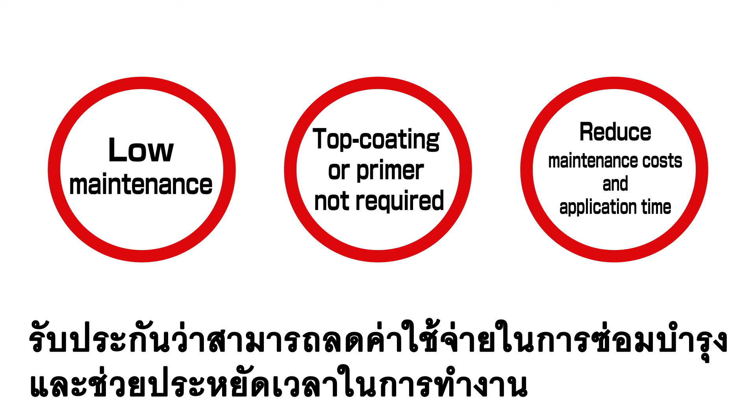As it's pre-packaged in single packs, it doesn't require mixing or the additional use of a primer or top coat. It's easy to use and can be applied directly to steel and galvanized surfaces. ROVAL is low maintenance and guarantees a reduction of both maintenance costs and application time.

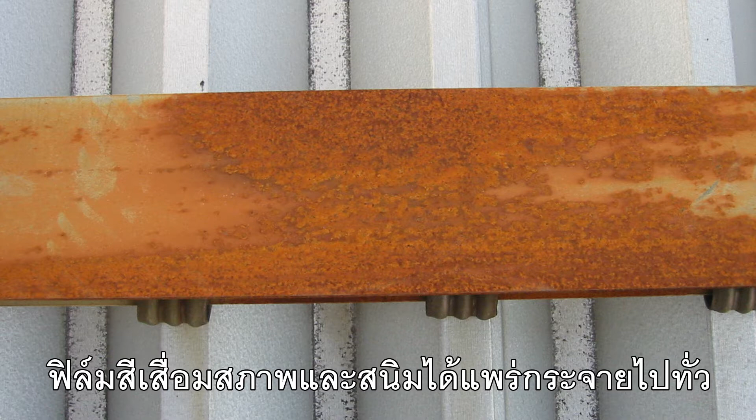This is a photograph of steel frames 7 years after being painted with conventional paint. The paint film has deteriorated and rust has spread throughout. This steel frame will be repainted with ROVAL.

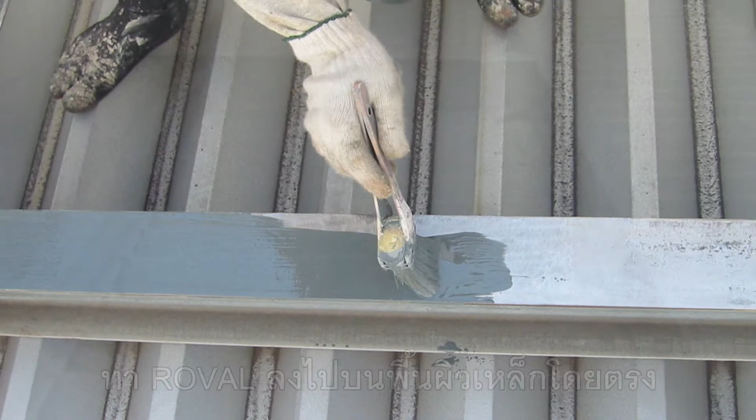Remove all rust and old paint with the appropriate power tools. Apply ROVAL directly to metal surfaces. Here is a photograph of steel frames 10 years after being repainted with ROVAL. There is no rust.

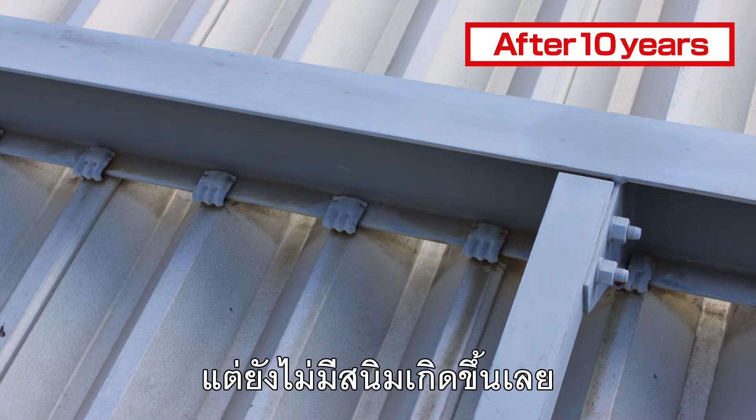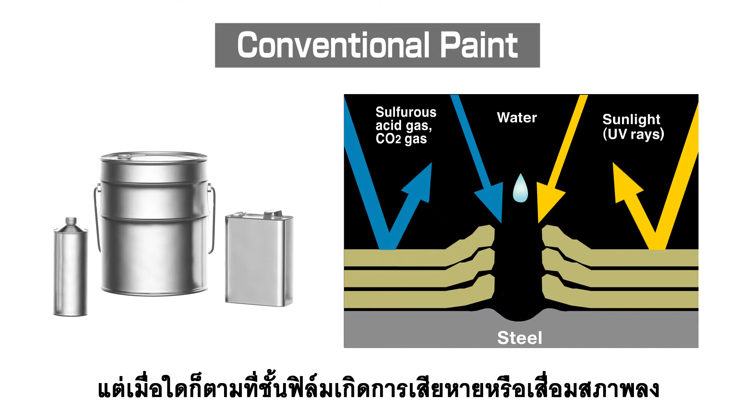What is the difference between ROVAL and conventional paint? A conventional paint film acts as a surface barrier against water and air. But once the film is damaged or has deteriorated, rust develops in that area and begins to spread underneath the film.

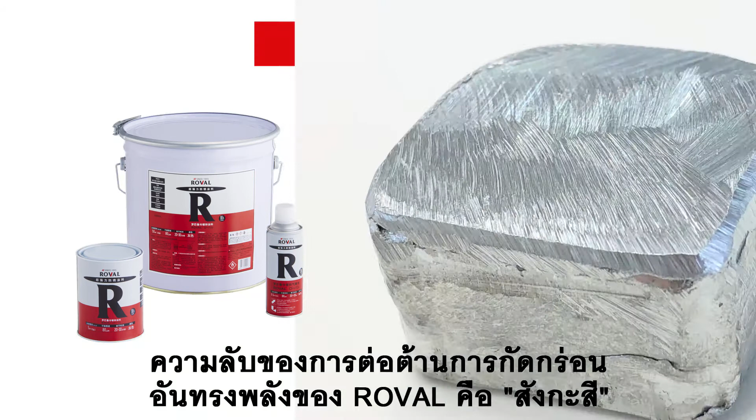The secret of ROVAL's powerful anti-corrosion is zinc. The metal zinc rusts more easily than iron. By using this property, keeping the iron and zinc in close contact, only the zinc side will rust and not the iron.

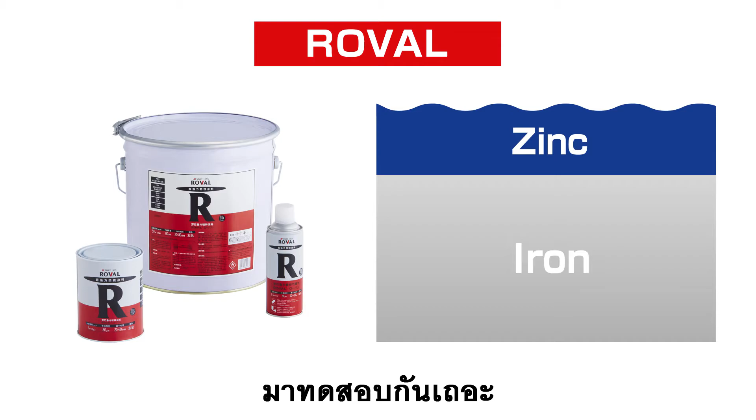Let's actually verify. Prepare 2 steel plates and immerse one in salt water. On the other steel plate, put a slab of zinc and immerse in salt water.

After 2 weeks, only the steel plate without zinc has rusted. On the other hand, the steel plate carrying a slab of zinc has not rusted. The zinc protects the iron by rusting instead of the iron.

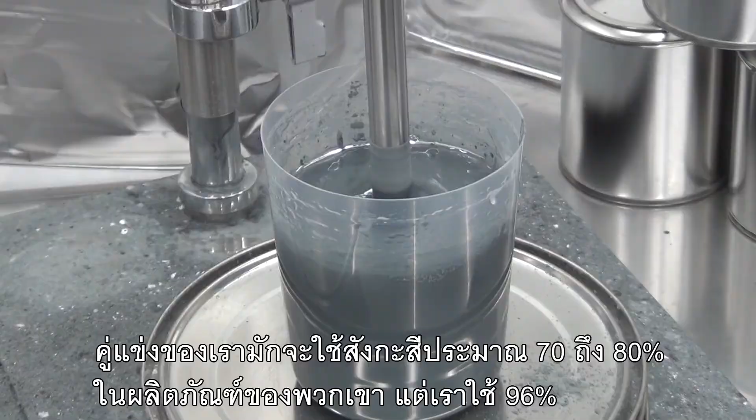We succeeded in raising the dry film zinc content to 96% by mixing a large amount of zinc powder into a special resin. Our competitors usually use around 70 to 80% zinc in their products, but we use a staggering 96%. ROVAL is a paint that can make the most of the anti-corrosion ability of zinc.

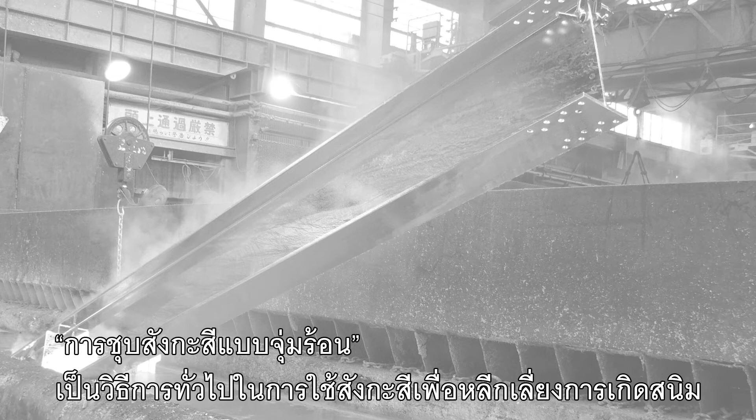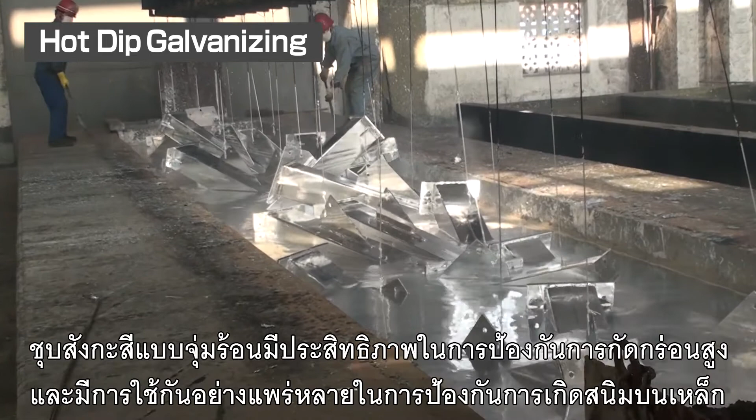Hot dip galvanizing is the most common method of using zinc to avoid rust. Hot dip galvanizing is the process of forming a protective film of zinc by dipping steel structures into molten zinc with a temperature above 430 degrees centigrade. Hot dip galvanizing has high anti-corrosion performance and has been used widely for rust prevention on steel.

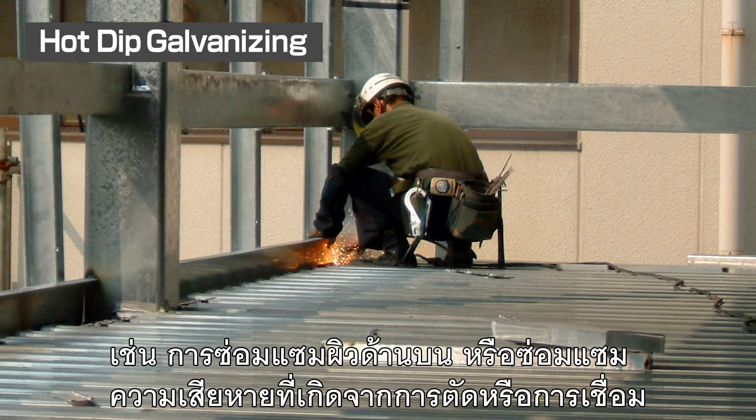Since this process requires the use of large equipment, it is not practical for small applications such as touch-ups or repairs of damages done by cutting or welding. Conventional paints are not suitable for such repairs because they do not provide strong enough protection.

ROVAL combines the ease of painting with the excellent corrosion resistance of hot dip galvanizing. Since ROVAL is simply applied in standard temperatures, it is called cold galvanizing compound.

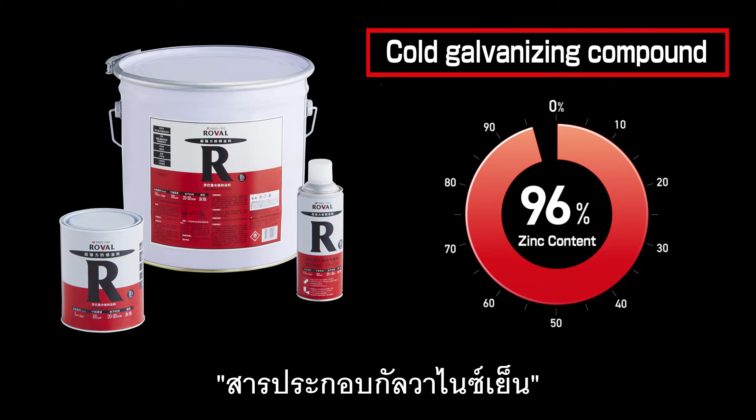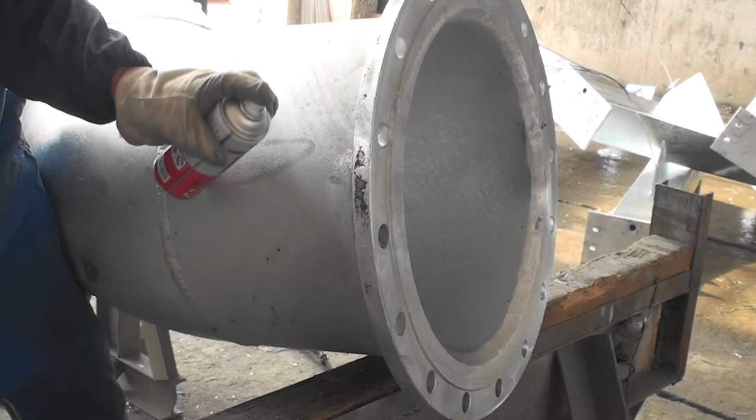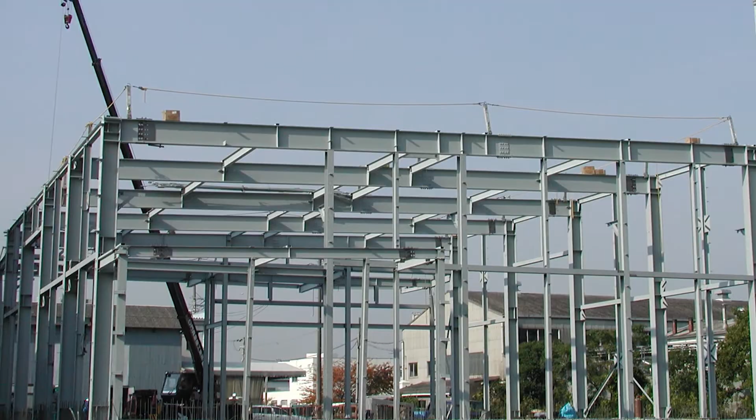ROVAL can be used not only for touch-ups of cut surfaces, welds, and non-plated parts, but also for large steel structures and parts that are difficult to be hot dip galvanized. ROVAL can be applied directly to old or thin galvanized surfaces to prolong the anti-corrosion effect without the need for additional re-galvanization.

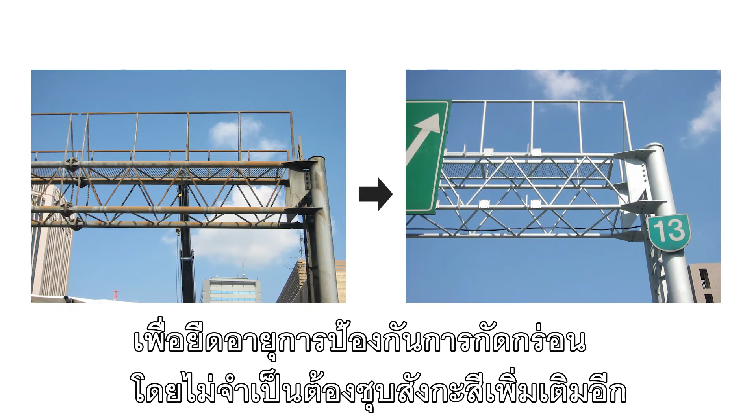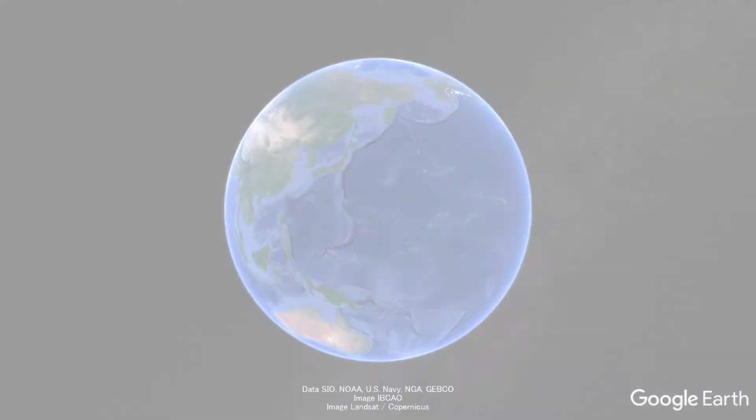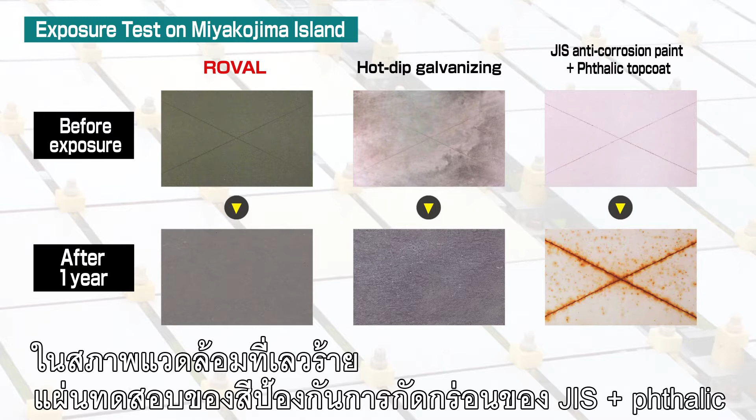We conducted an exposure test on Miyako-jima Island. It is surrounded by sea and located in the southern area of Japan. Here are photos of the test results. In such a harsh environment, test pieces of JIS anti-corrosion paint plus phthalic topcoat generate rust in 1 year. And in 3 years, the rust spreads over the entire surface.

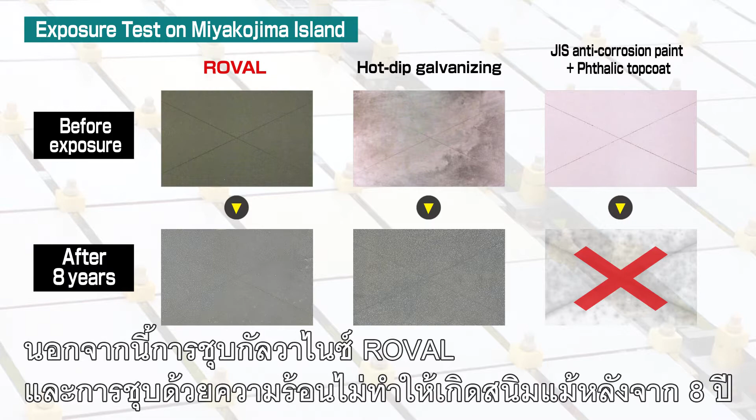On the other hand, with ROVAL and hot-dip galvanizing test pieces, no rusting occurred even after 3 years. In addition, ROVAL and hot-dip galvanizing did not generate rust even after 8 years. As you can see, ROVAL alone can guarantee long-term maintenance-free performance without the need for a primer or top coat in an easy application format.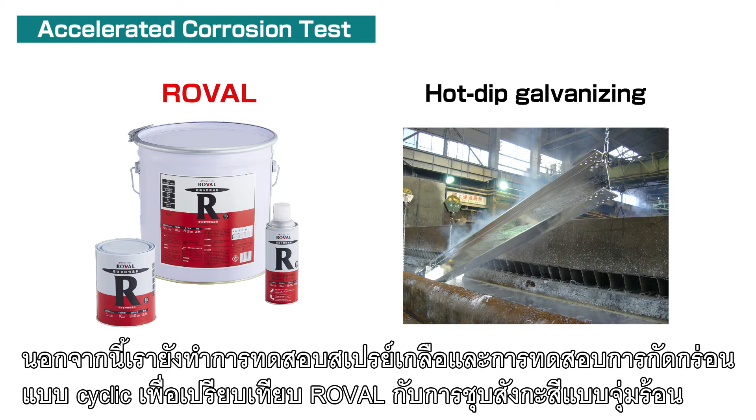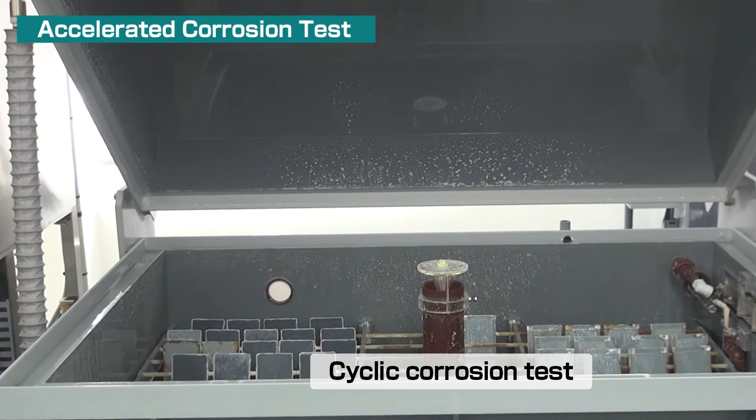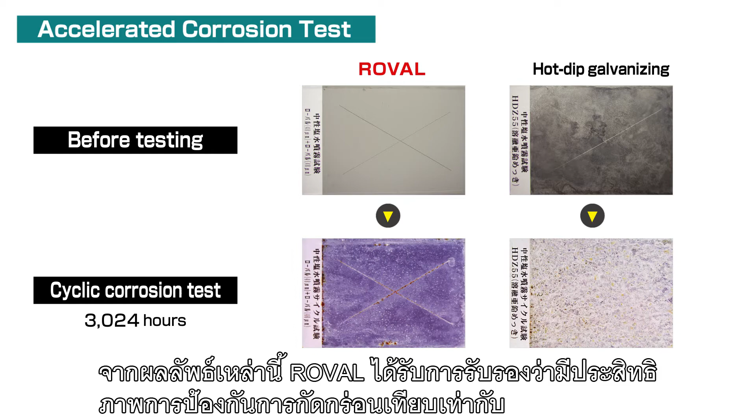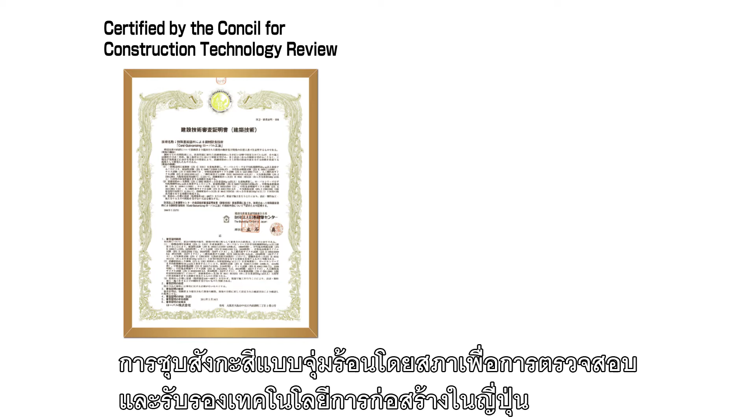We also conducted a salt spray test and a cyclic corrosion test to compare ROVAL with hot-dip galvanizing. Here are photos of the test results. From these results, ROVAL has been certified to have equivalent anti-corrosion performance as hot-dip galvanizing by the Council for Construction Technology Review and Certification in Japan. In addition, ROVAL's excellent performance was recognized and certified by the Minister of Land, Infrastructure and Transport.

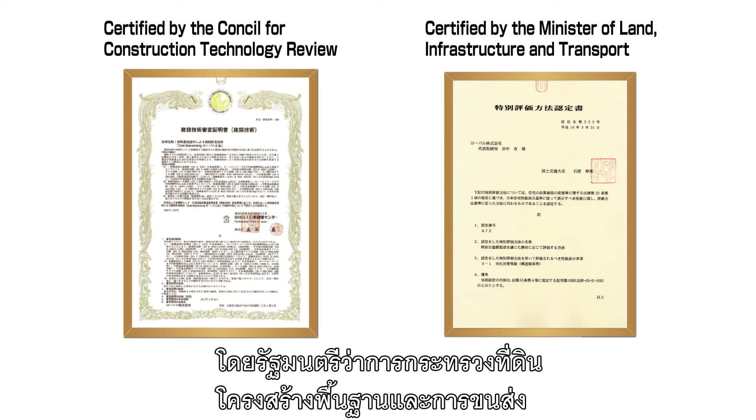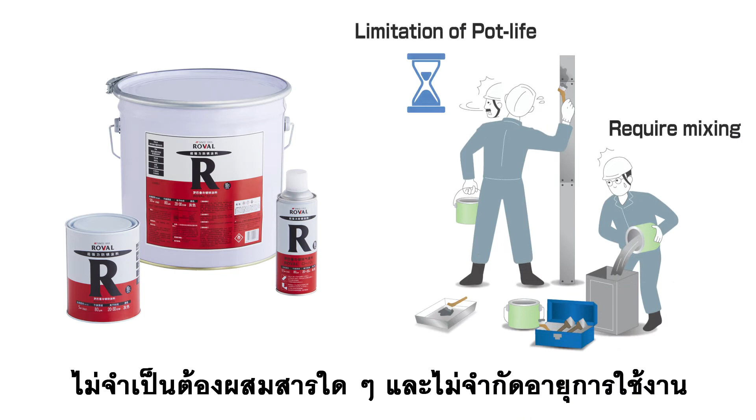ROVAL is an easy-to-handle, single liquid-type compound. It does not require any mixing and has no limitation of pot life. The rest of the paint can be kept in a closed container.

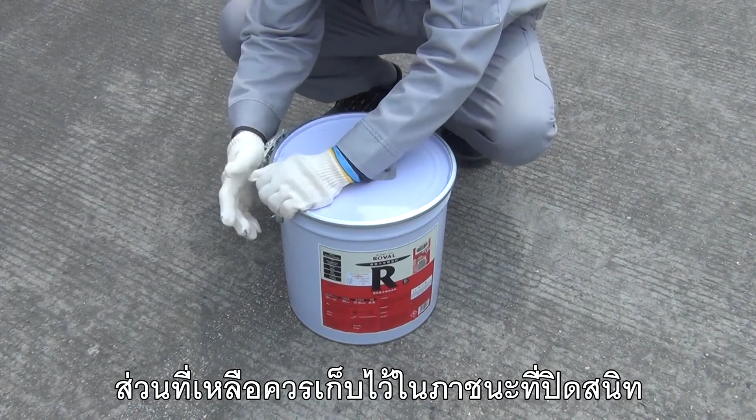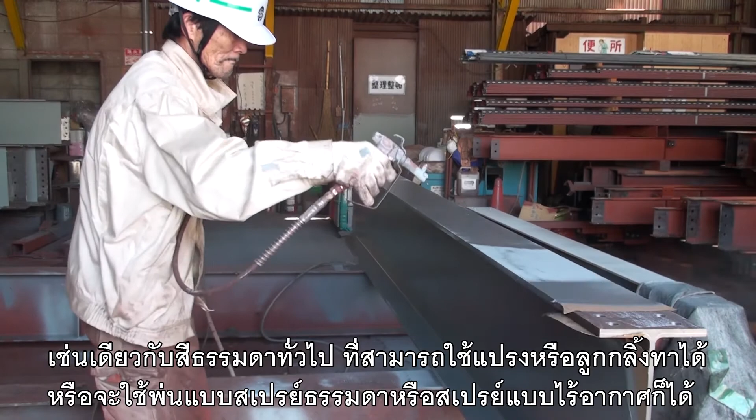Like other conventional paints, it can be applied with a brush or a roller or a conventional spray or an airless spray. An aerosol version is also available.

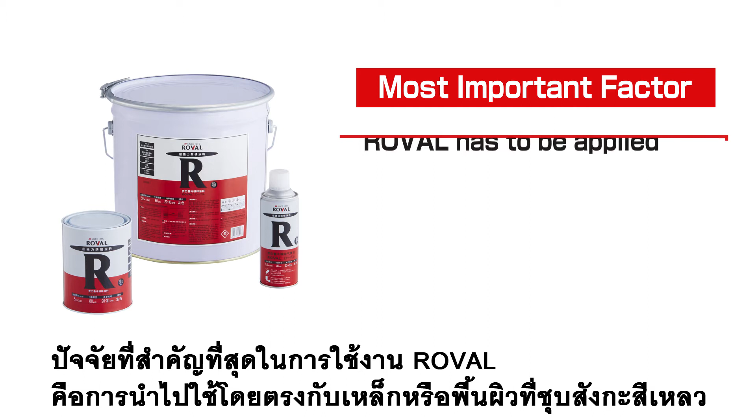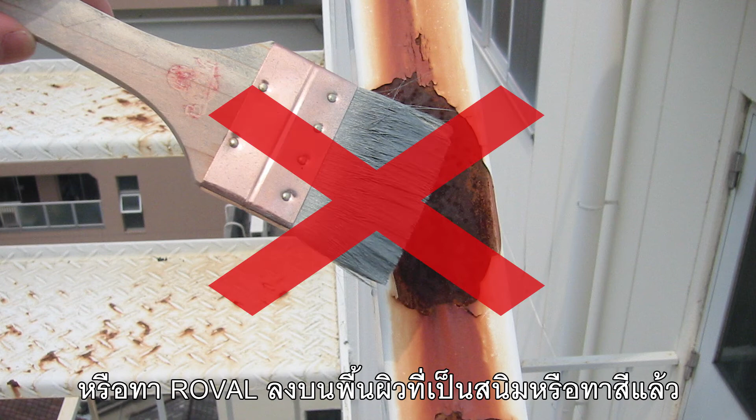The most important factor in the application of ROVAL is to apply it directly to the steel or galvanized surface. Do not use a primer, or apply ROVAL to rusted or painted surfaces.

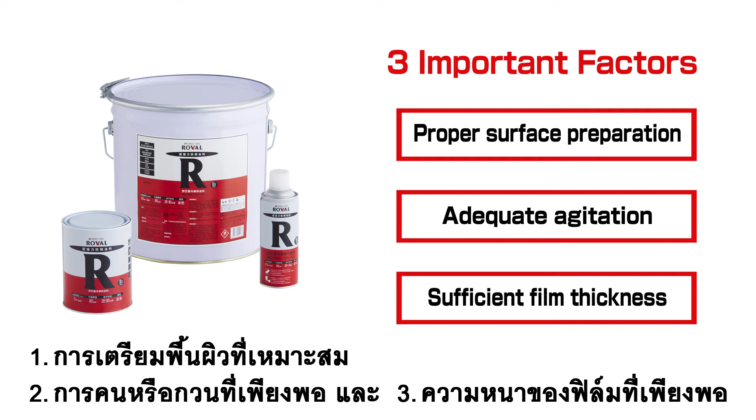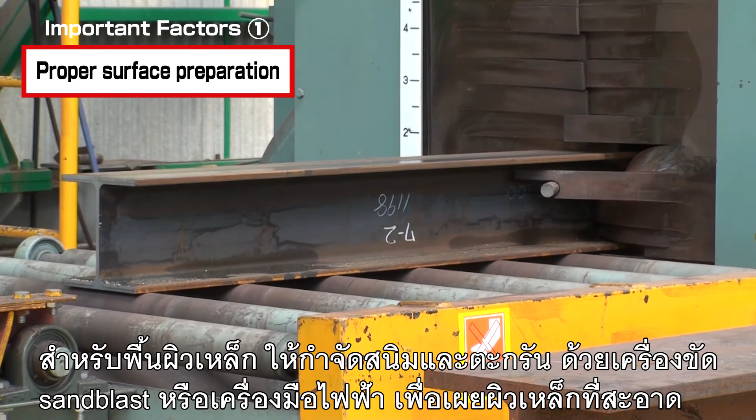3 other important factors in the application of ROVAL are proper surface preparation, adequate agitation, and sufficient film thickness. First, proper surface preparation. When applying ROVAL on galvanized surfaces, use a hand tool to remove white rust. For steel surfaces, remove all the rust and mill scale by sandblasting or using a power tool to expose the clean steel surface.

Second, adequate agitation. Because ROVAL contains a lot of powdered zinc, the contents may settle at the bottom of the can. Use a power paint mixer to obtain uniform viscosity. ROVAL's viscosity is pre-adjusted. Dilution is not required.

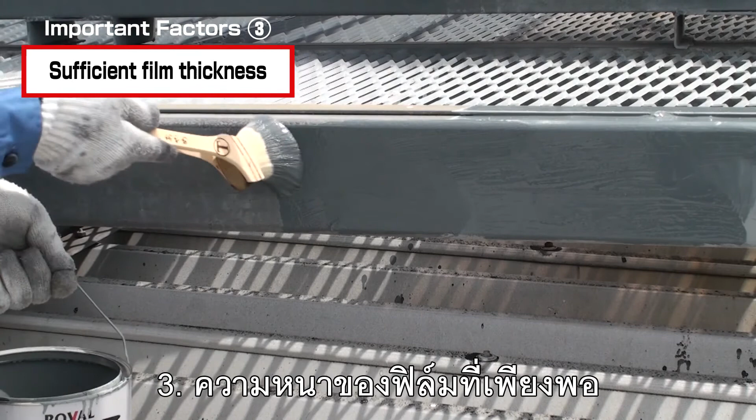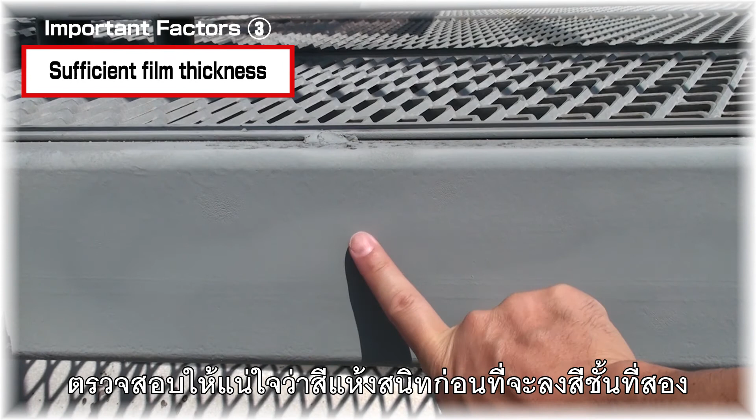Third, sufficient film thickness. Anti-corrosion performance is directly proportional to dry film thickness. Do not spread the paint too thin. Apply 2 coats of ROVAL to obtain a film thickness above 80 micrometers. Make sure the paint is dry to touch before applying a second coat.

While keeping the outstanding anti-corrosion ability of ROVAL as it is, we have launched a water-based version called Aqua ROVAL. Compared to ROVAL, Aqua ROVAL cuts VOC by 93%, has no thinner odor, and no fire hazards. You can use it with confidence in shopping centers, train stations, and public facilities.

Aqua ROVAL pots are sold with their zinc powder and paint solution packaged separately. Just before use, stir the paint solution, then add the zinc powder little by little. After that, stir the mixture well with the power paint mixer until lumps disappear.

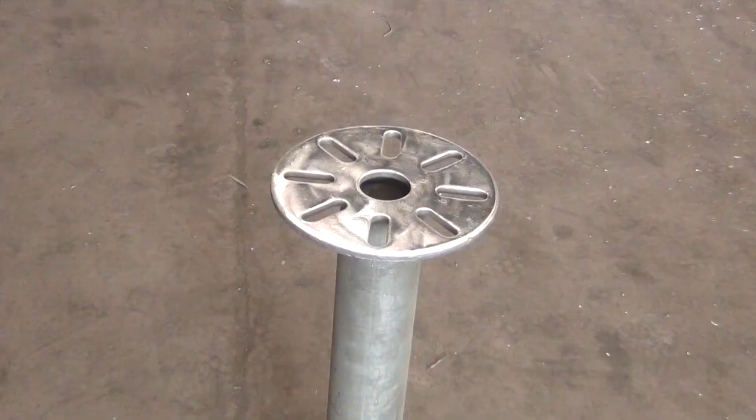In addition, ROVAL Silver has a similar finish to hot dip galvanizing. We also offer a cosmetic spray for zinc plating, MC Spray, which is ideal for color matching after hot dip galvanization and for hiding blemishes or ROVAL repairs.

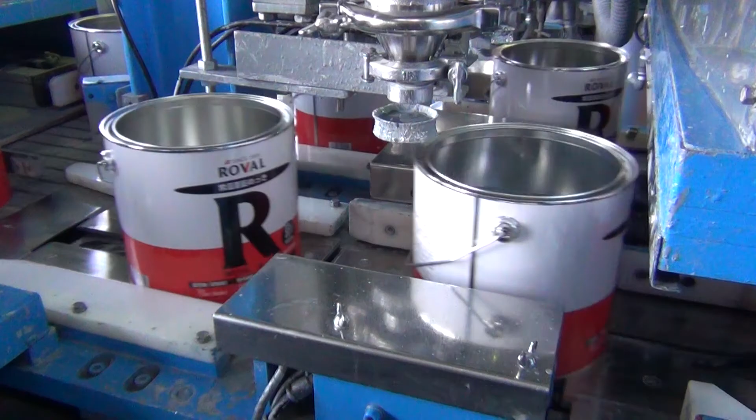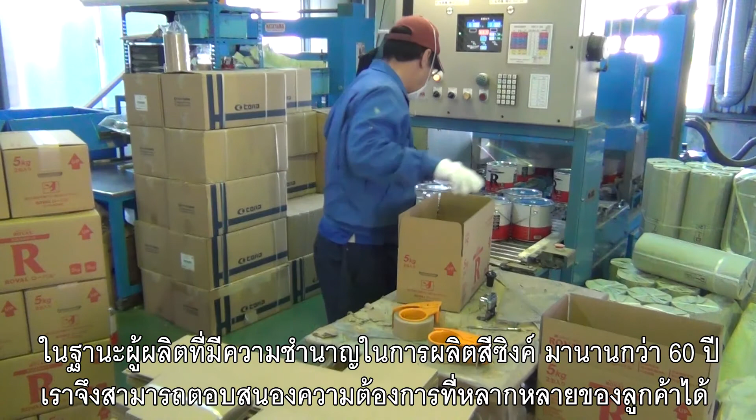ROVAL Corporation was founded in 1955 in Osaka, Japan. In 2003, we also established Shanghai ROVAL Zinc-Rich Paint Corporation in China. Our company shares the same unique name for its product and company name. As a specialized manufacturer of zinc-rich paint for over 60 years, we have responded to the various needs of our customers. We supply high-quality paints to Japan, China, and around the world.